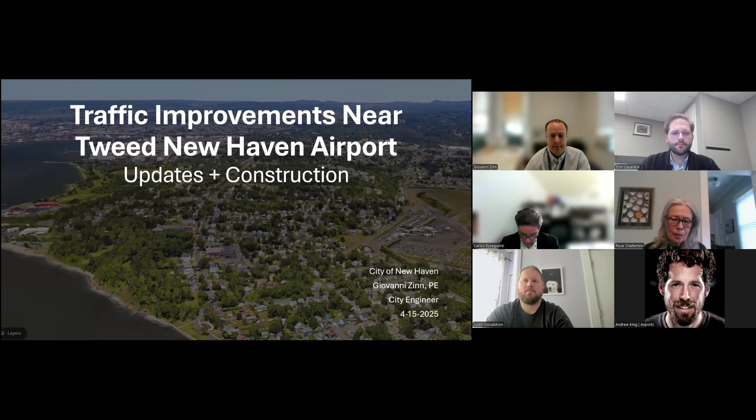So what we've heard, right? A lot of this came out of the June 3rd annual Tweed community meeting. We heard a lot about significant traffic on Fort Hale Road related directly to the airport. At peak moments of that traffic, it can be hard for residents on Fort Hale Road and some of the surrounding streets to get out of their driveway, and any backups that happen at arrivals or departures at the airport spill back into the neighborhood.

We talked about this at our November 12th community meeting, and since then, the dominant feedback has been to address potential changes to traffic volume in front of Nathan Hale School. Those are the most significant common themes we've seen come through regarding this project.

So what are the goals of the project? Decrease the overall traffic volume on Fort Hale Road, to get rid of some of the congestion that can happen if the airport backs up. Reduce the total miles traveled through the neighborhood between the airport and Townsend Avenue, which is a state road. Improve the pinch points internal to the airport so traffic isn't backing up and spilling into the neighborhood. And finally, keep traffic away as much as possible from Nathan Hale School, or entirely away during pickup and drop off, which are the peak times of pedestrian movement and general traffic around the school.

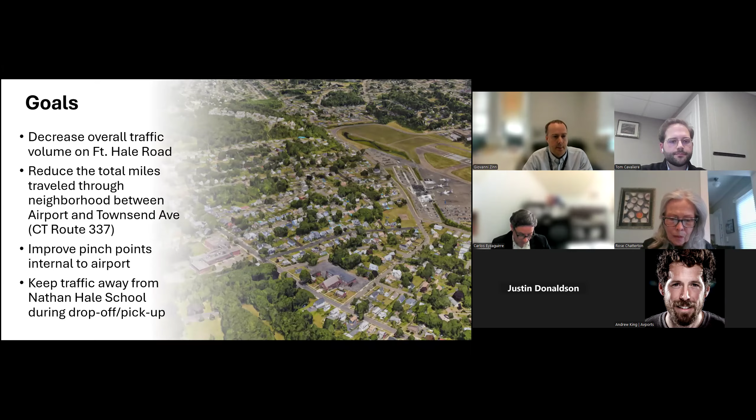So matching up to those goals, the proposed improvements are to open a new exit with no entry at the intersection of Dean Street and Burr Street, improving airport circulation by removing some of the pinch points within the airport at departures and arrivals, and improving the intersection geometry at Dean Street and Burr Street. One thing I'll note is that while a lot of the focus is on airport traffic, the plan is still to move the terminal to the east side of the airport, where this will not be an area that has airport traffic.

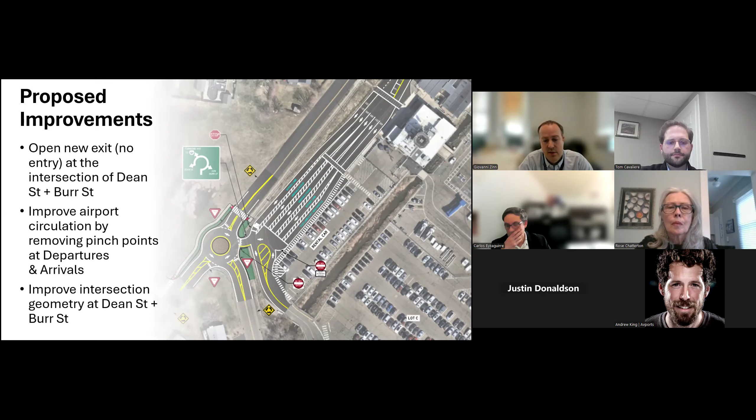The improved geometry of this intersection is something that will provide benefit long beyond the time of airport traffic through here, but it's something that improves an intersection that has a fairly awkward geometry right now.

So I'm going to go through each of those in more detail. Decreasing two-way traffic through the neighborhood: right now, most of the traffic to the airport is going through Fort Hale Road, both into and out of the airport. The purpose of this project, among other things, is to decrease the traffic on Fort Hale Road by roughly 30%, by keeping all of the incoming traffic and some of the outgoing traffic on Fort Hale Road, but routing some outgoing traffic outside of drop-off and pickup times at the school out Burr Street to Townsend Avenue.

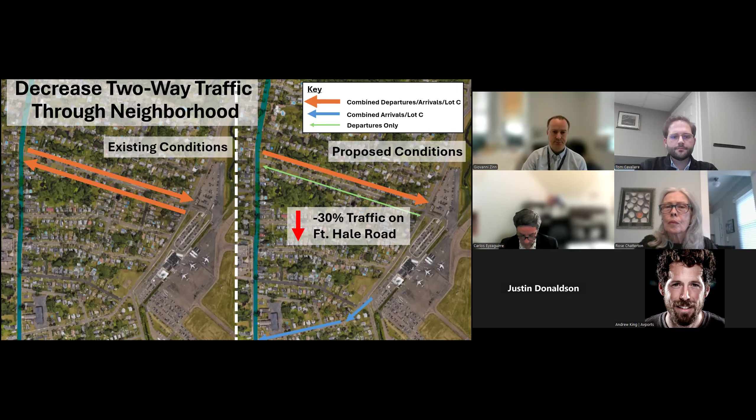Reducing the total miles traveled on local streets: outside of pickup and drop-off times at Fort Hill at Nathan Hale School, it would be a shorter way from the exit, about 1,300 feet as opposed to 1,900 feet. That's fewer homes we're passing before getting to the state highway on small, narrow residential streets.

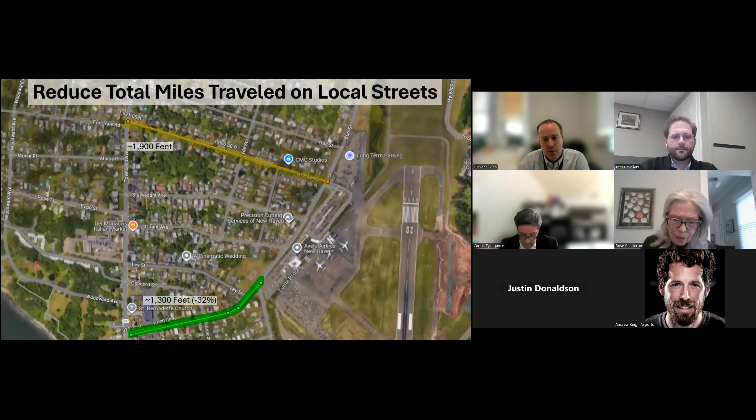So, improving airport circulation. Many of you live near the airport, you know this as well as I do. Vehicles currently come into the airport and go down this aisle, then select whether to go to the arrivals area or the departures area. However, all of the arrivals traffic has to then pass through the departure area as well, and this can lead to backups right here in front of the main terminal, which then leads to backups back out the front of the airport.

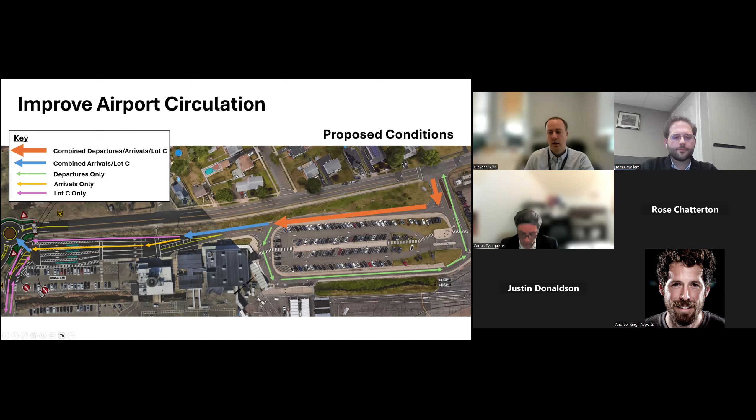So the improved circulation eliminates that pinch point in front of the terminal by allowing arrivals traffic to continue on to the arrivals area and then head back out of the airport without having to loop back through it. We have a little more space for arrivals traffic to queue up while waiting to pick up passengers, and less traffic going back out through just departures and these lots. It should be noted that Lot C, off the lower left of the page, does exit at the new exit over here at Burr and Dean, but that traffic is about 10% of the overall airport traffic.

Really the bulk of it is arrival and departure, drop off and pickup.

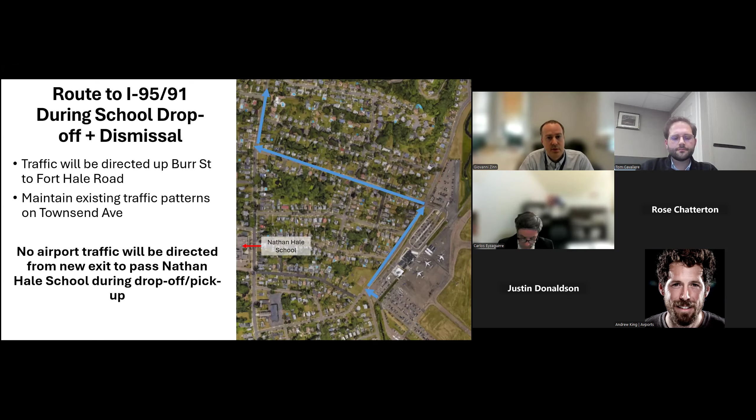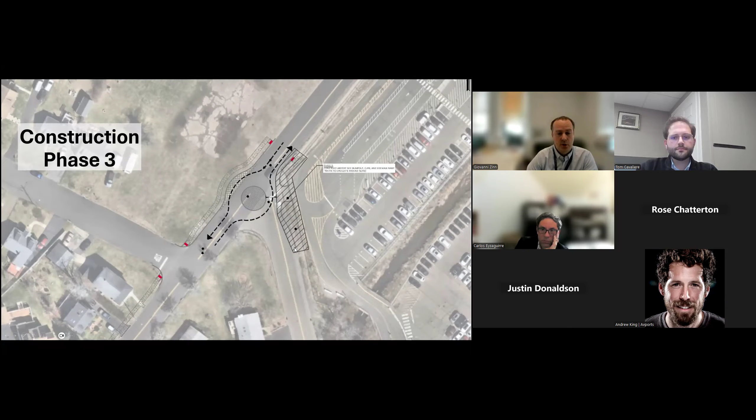So a little bit about the delivery schedule. It's weather dependent. As we said in November, we wanted to start in spring of 25 at the latest. We'd like to start in the next couple of weeks and be able to deliver this in about a 1 to 2 month construction schedule.

Any issues, feel free to reach out on that. Happy to, we'll take questions here as well and comments in a couple minutes.

But I really want to say thank you to everyone that reached out. Traffic around the airport is a very difficult challenge, and it's one that people feel very passionately about. And I certainly empathize a lot with the challenges of all that traffic. I actually live myself off of Townsend Avenue, just slightly to the north of here.

And so this is my neighborhood too, and I feel that keenly. Again, I want to reiterate, happy to meet with any of the school parents, the administrators, the staff, to look at more ways to improve the pickup and drop off situation around Nathan Hale School. And really, I hope you emphasize our commitment to make sure that none of this traffic will go by that school during the pickup and drop off times. So with that, are there any questions?

Well, what I'll do, Giovanni, real quick is just wanted to reiterate and underline the piece here about the Nathan Hale School and the flight schedule. So, as the roundabout and the internal striping at the airport relates to traffic and air schedule, this is really to increase and better manage arrivals traffic. And there are no arrivals before 8 o'clock in the morning, and in the afternoon, of course.

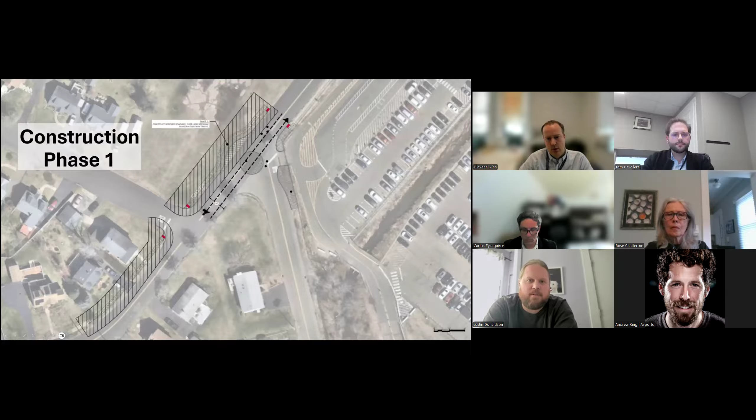I think the challenge you have now is this: we're planning to add sidewalk in this area, off the page to the left, down and to the left, and then through here, connecting back up to the sidewalk network on the east side of Burr Street.

On Dean Street right now, if you were trying to cross from Dean to the opposite side of Burr, there's no traffic control there, no stop sign on Burr. We've heard a lot of reports of people speeding through the neighborhood on this stretch. It's straight, it's long, and on the east side there's just the airport, not a lot of driveways or roads.

So this will slow people down, the roundabout, as they come and approach the intersection. I think it'll slow down a lot of the traffic, and you also have the benefit of an added crosswalk now.

Dean Street doesn't have any sidewalks, although I'll note this area is where the Shoreline Greenway Trail will go through and provide a 12-foot mixed-use path on the east side of Dean Street, providing a lot of pedestrian benefits there as well. I think Dean Street will get all of that together, and the Shoreline Greenway Trail design will work well with how this intersection is set up.

But we are providing that sidewalk connection down Burr Street. This was like a 2-block hole in the sidewalk network on Burr Street.

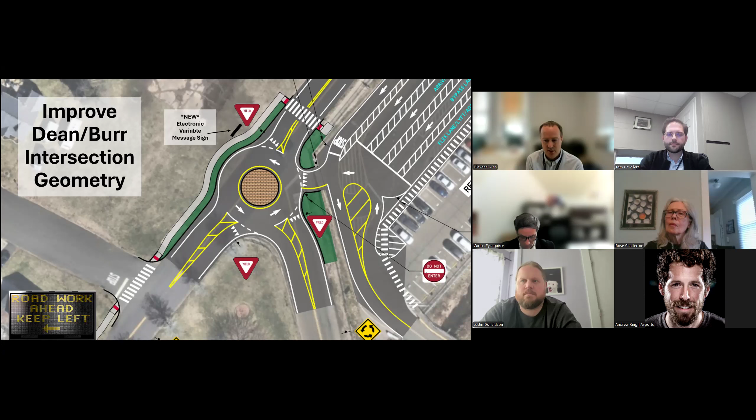We obviously haven't seen any final plans for any of this, but the terminals on the east side, the terminal traffic would all be on that side. I don't believe there's any way to drive from the east side to the west side internally on the airport without crossing the airfield, which is not something the public would do. I wouldn't expect any terminal traffic there.

So those parking lots will be gone — they won't be there on our side, the Morris Cove side. I would refer you back to all of the discussion around the original lease and all that. I don't know if anyone else wants to chime in on that; that's a little outside of my area of complete expertise.

I think the bulk of the traffic, if not all of it, would be on the East Haven side. But again, that's not my area of expertise.

I'll defer to Andrew if he has any additional comment. But ultimately, the relocation of the terminal from the west side to the east side is also going to be the relocation of all the arrivals and departures traffic, and all the things we're talking about today are part of the broader goal of managing the growth we're experiencing here in the west terminal, while moving forward on all the plans to relocate the center of activity away from this area.

And thank you, if there were no further questions or comments from committee members. I'm good. Thank you.

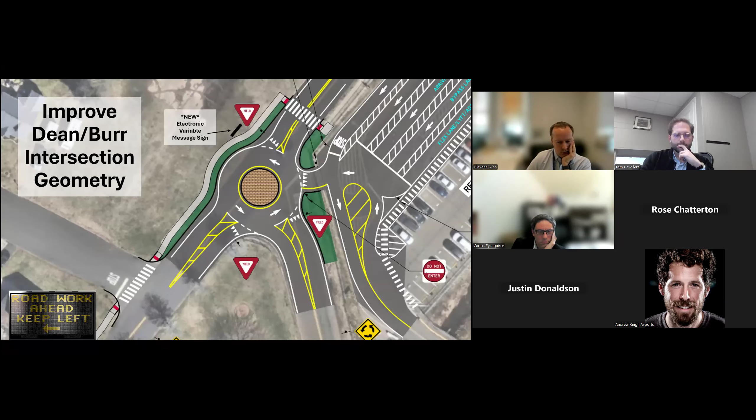There's also an opportunity, if you pull up that map, the on-airport diagram and lane pattern. Another opportunity we've thought about is when you have a bunch of departures coming in, because they don't have to come back and go around the way they used to, we can actually use that Lot C traffic pattern you see to the right there to push departure cars coming in to drop folks off. We can push them down into there as well, to allow drop-offs and then let them exit the airport that way when things get really hairy. So it really gives us a lot of opportunity to unload Fort Hale, just by rearranging the way we're doing this traffic right now, to the point that Giovanni made.

We're going to have fewer people trying to come back out over there, so that decreases the space taken up by those folks, but also gives us the ability to just push them right into where the arrivals terminal is and let them out there as well, since it's a short walking distance from there. So I think this creates a lot of opportunities for us to unload Fort Hale.

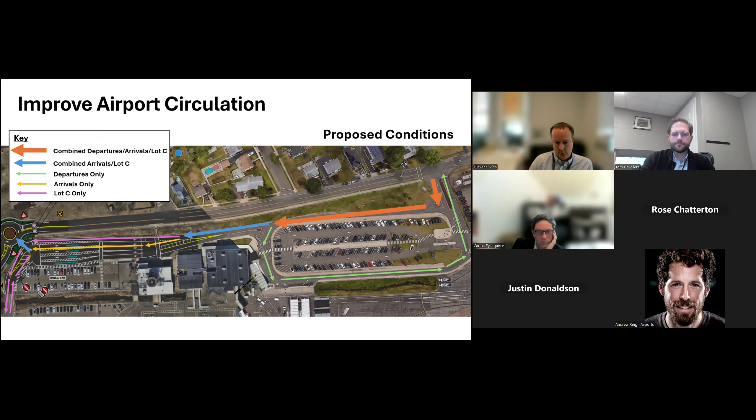Oh, hit the wrong one there. Hi, Carolyn. Hey, Carolyn, can you hear me now? Yes, we've got you. All right. So a lot's running through my mind right now, hearing the comments.

Obviously, I live on Fort Hale Road. We live it all the time, as do the residents, the most impacted residents, I would say, Burr Street, etc. Rose made a comment early on about what exactly is the police officer doing. I live one house away from the four-way stop sign at Hyde Street and Fort Hale. Just this afternoon, at the afternoon buildup, I stood at my window and watched people fly through that intersection. That would be a great thing for the cop to come check out, maybe help enforce that there is a four-way stop there.

People really don't pay a lot of attention to the traffic signs and what the directions are. There was another time last week when it was particularly backed up, and people were dropping off their passengers in front of my house to walk down the street with their luggage. So I know the plan that's been presented is hopefully going to reduce traffic on Fort Hale by 30%. I think that has a big asterisk after it, because there's a lot of unknowns in your business, and you guys know this better than I do, but all it takes is a couple of bad weather days in a row, and all of a sudden your normal planned traffic becomes doubled, quadrupled, or whatever.